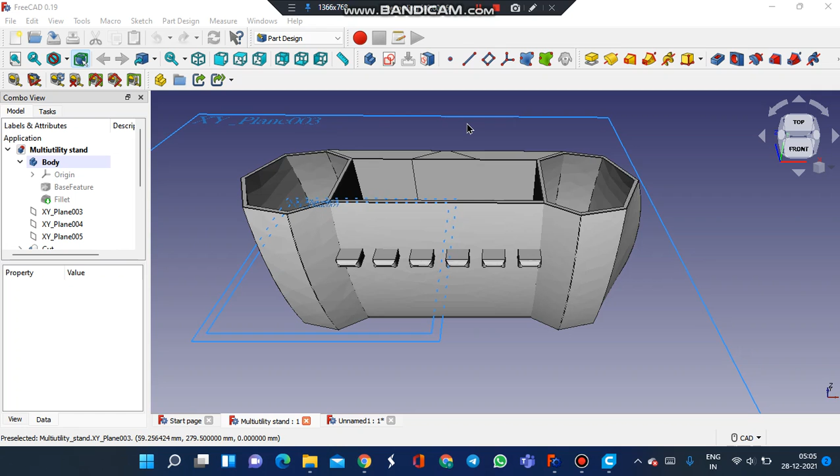So I have created this multi-utility stand here. The purpose of creating this stand is to reduce the mess created in the washroom. There are a lot of things to handle there, like the toothpaste, the toothbrushes, combs, razor, trimmer, and shampoo sachets, etc. What you can do is you can just dump them all in these three components provided here.

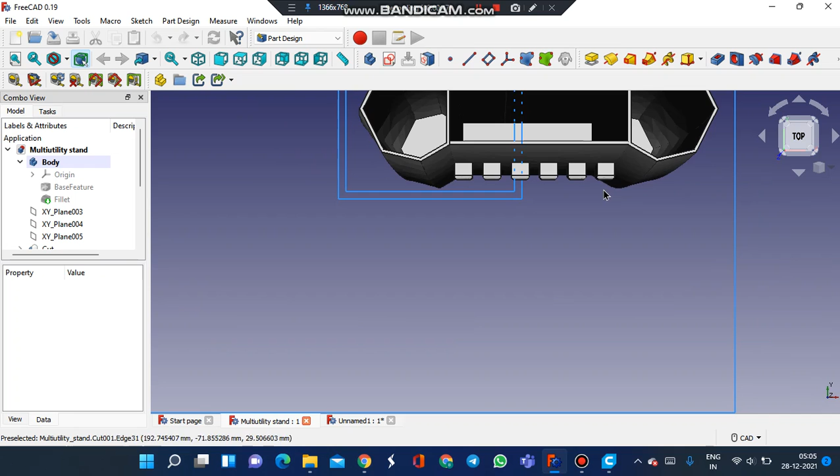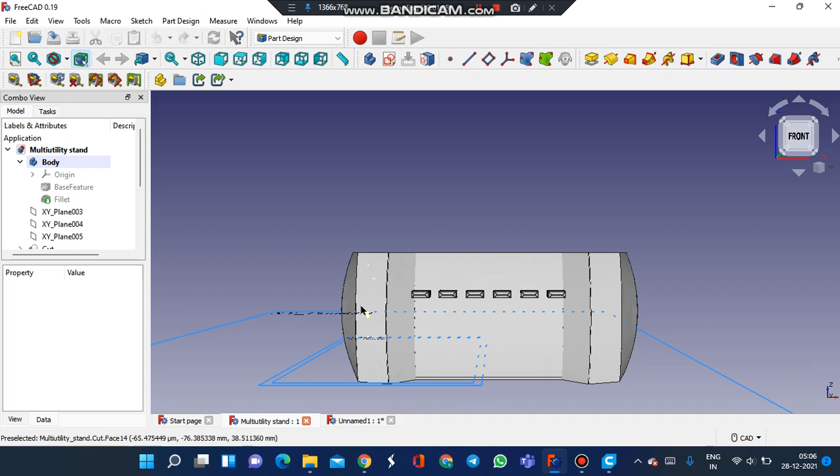First of all, I used the polyline option to make this heptagon here, to make this wire frame of the heptagon using the sketch option in the part design. Then I stacked four heptagons one upon other in the z direction, and then used the loft option to create this section here. Then I used the thickness option to give it this 2 mm thickness.

Then I replicated similarly here, and then I used the pad option to pad this edge over to this, and then used this edge to pad it over to this end only in the x direction. I didn't specify here the y and z direction. So I ended up with these flat surfaces here and here.

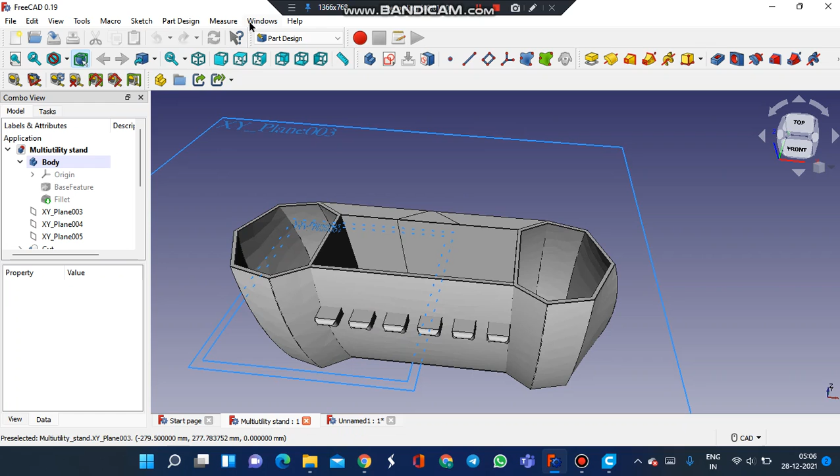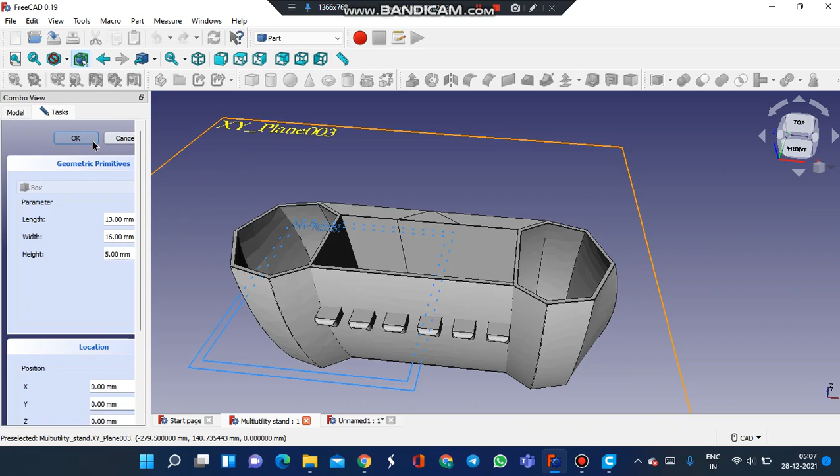Then I embedded a cube from the part option from here, and I will also show you its dimensions. Then I filleted to a 2 mm radius and then arrayed it. I used the orthogonal array option to spread it in this x direction. And I also embedded two spheres.

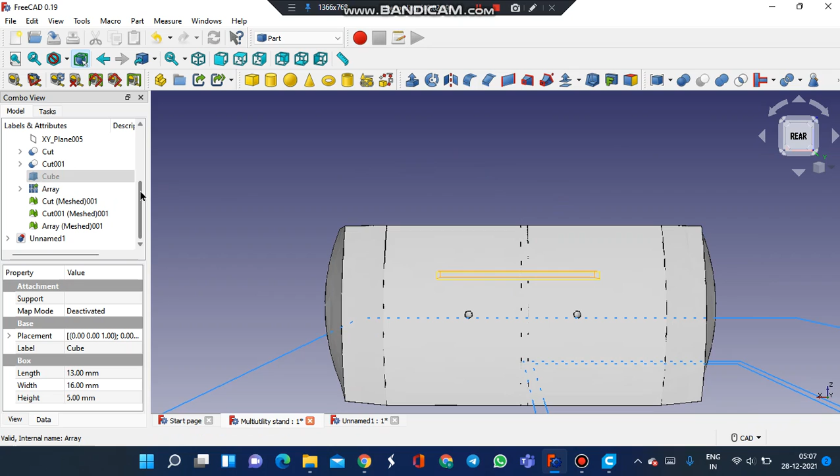I embedded two spheres at the back to make this particular stand hang. So I embedded two spheres in the back and used the boolean operator to cut down those spheres and end up with a nice groove which will make this particular stand hang on the wall. Then I meshed it up. I created the mesh and finally it looked something like this, the end product.

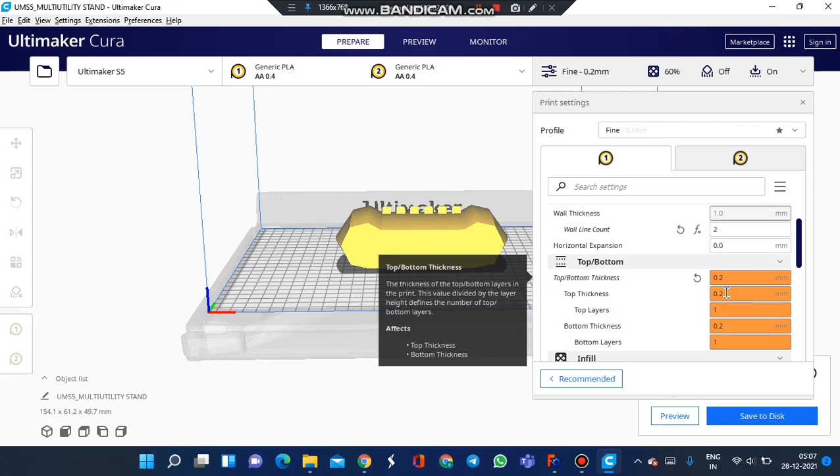And in the Cura software, you can see the specifications here. The thickness is 0.2. I compromised this top and bottom thickness to 0.2 mm, but I actually increased the infill density to 60%, which will make its strength better.

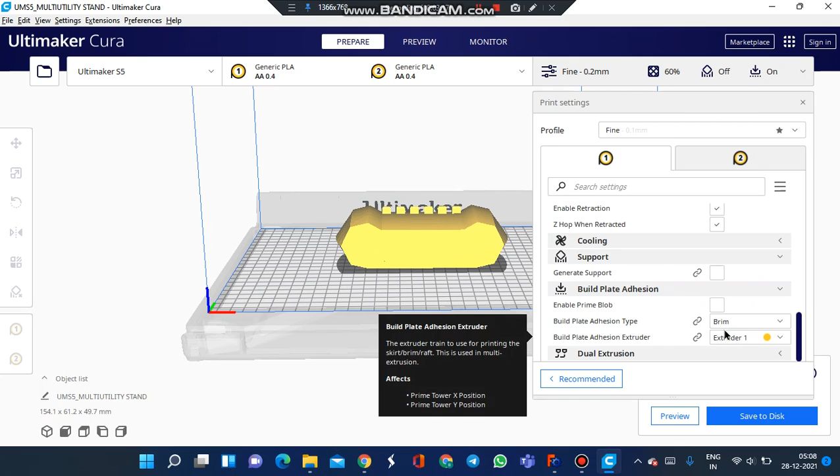And I set the printing temperature as 200 degrees Celsius and build plate temperature as 60 degrees Celsius. The speed mentioned in the file is 60 mm per second, and I used the adhesion as brim and the extruder as extruder 1. And you can also see the time as 7:42 minutes.

I will also preview it, so it will go like this. You can see.